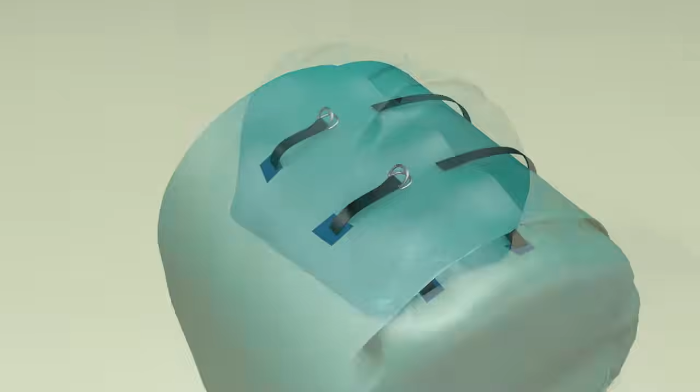Begin by unfastening the securing straps on the provided valise and roll the unit out fully.

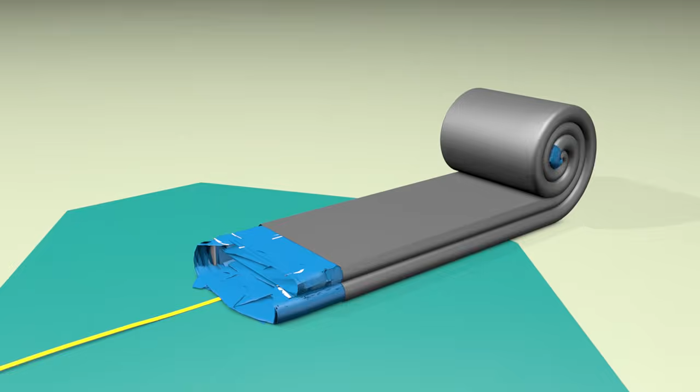With 2 people positioned on either side and making sure that the outer canopy and internal tubing is held together, unfold the shelter.

Fold out the vehicle flaps. Locate the inflation and deflation valves from beneath the labelled valve flap, and you're now ready to start inflating. The shelter is equipped with 4 valves, 2 for inflation and deflation with an electric pump, BA cylinder and hose,

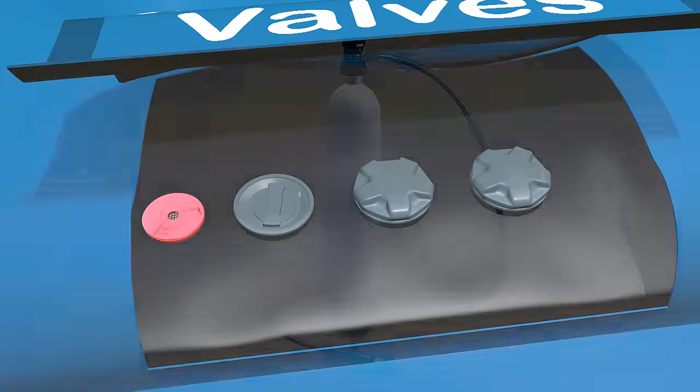or a 12-volt pump with a battery for when no standard power supply is available. A pressure sensor valve for use with a pressure sensor pump. This pump regulates the beam pressure and is in place for when the shelter is used over longer periods. And lastly, an overpressure valve to ensure the shelter is not over or under-inflated.

Begin inflating the shelter. The beams will inflate sequentially. This process will take no more than a few minutes. Listen for the activation of the overpressure valve. Once this starts to release air, you'll know you are at the optimum pressure and inflation is complete.

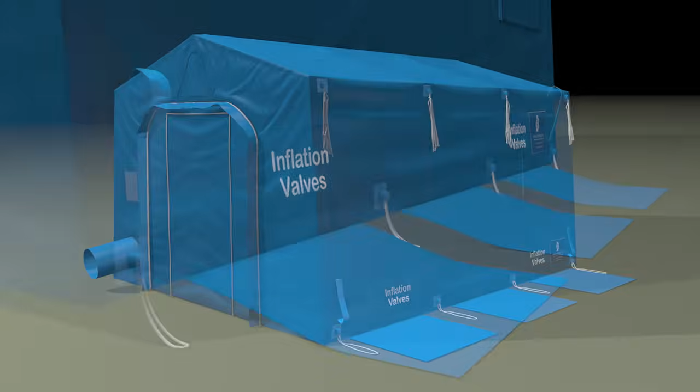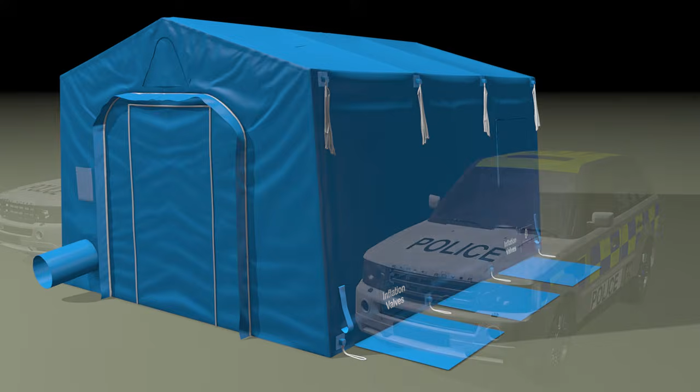There are grab handles on each corner, making the unit easy to position and reposition if necessary. High and low-level guy ropes, along with heavy-duty stakes. For hard surfaces, such as roadsides or mountainous terrain, the vehicle flaps can be used to ensure stability. The larger the shelter, the more anchor points and vehicle flaps are supplied, scaling with size.

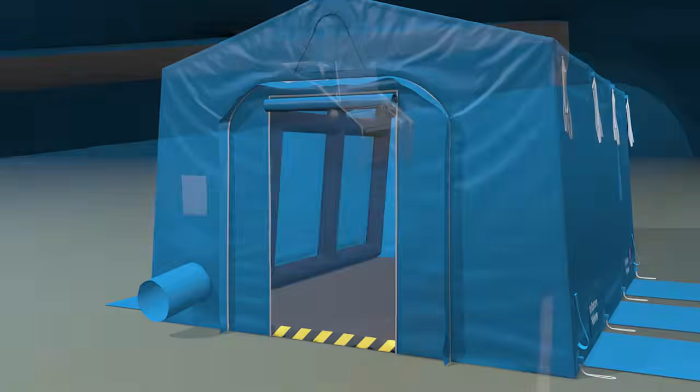Each door features 2 configurations: a large outer door, which can be fully removed for wide access, and a smaller inset pedestrian door, which can be unzipped and rolled up for controlled entry, offering privacy and limiting the flow of traffic. Once rolled up, the doors are secured in place with cam buckles.

Windows feature a 3-layer system. You can choose to use either the outer privacy cover, a clear PVC panel for natural light, or a fly mesh screen if increased ventilation is required.

All shelters are connectable via the doors, allowing additional annexes to be joined and endless configuration possibilities. Shelters are joined using either the zippers or by the Velcro rain gutter system.

Internal beams feature D-rings for attaching accessories such as lighting or room dividers. Service ports at either end allow access for services and ducting.

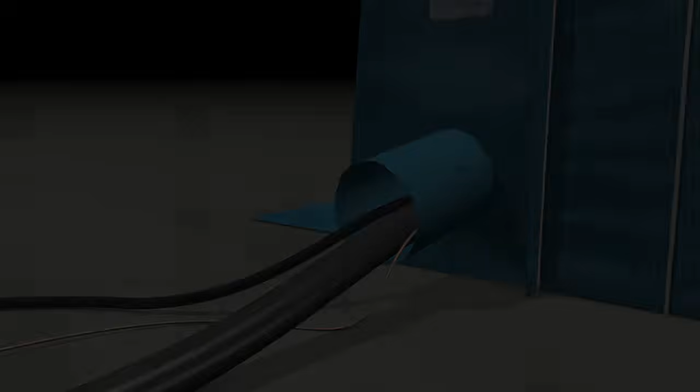The robust, airtight, sealed beam frame offers stability and durability. The outer canopy is waterproof, water repellent, and flame retardant, making the shelter reliable in any environment, perfect for fire and rescue teams, humanitarian relief efforts, emergency services, and training scenarios.

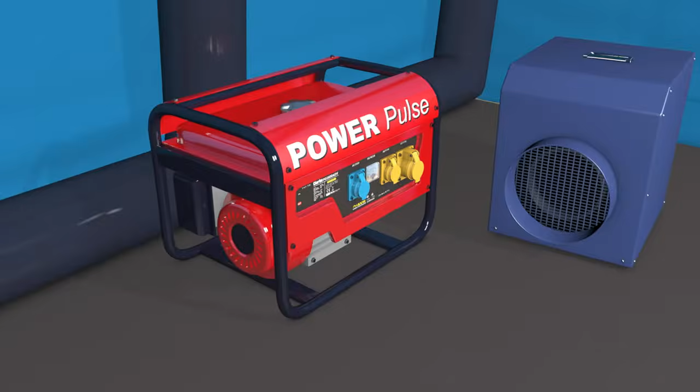With I.C.Brindle offering a full, bespoke service from the design to the supply, you are able to customize your shelter. Whether this is having your shelter in a particular color, adding organization branding, or additional doors and windows, to a range of accessories like various inflation options, lighting, heating, and power generators, we are here to ensure the product you receive meets your requirements and performs perfectly for its intended use.

As a guideline, the most common sizes include 8 meter by 5 meter for military and humanitarian use, 4 meter by 5 meter for fire and rescue services, airports and medical teams, 3 meter by 4 meter for police and forensic teams, 3 meter by 2 meter for search and rescue missions.

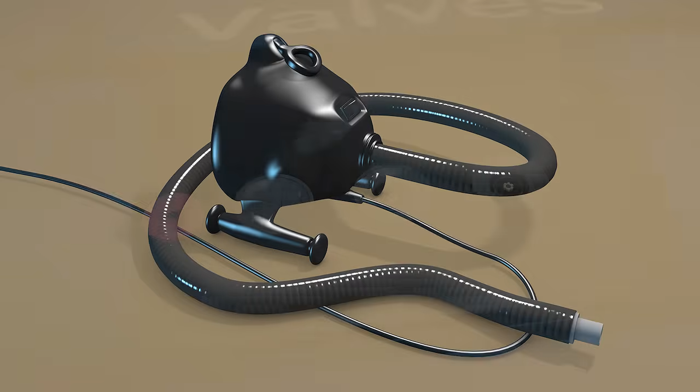To repack your I.C.Brindle shelter, unzip at least one door and release the center of inflation-deflation valves. Use the pump in reverse and fully extract the remaining air. Once the air has been removed, reseal the valves to prevent any air re-entering the beams.

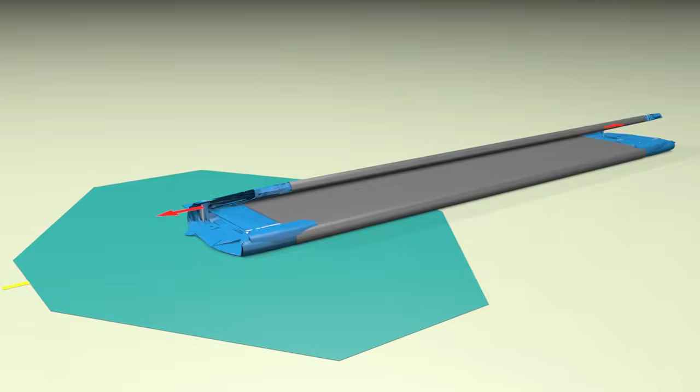Whilst holding both the outer canopy and internal beams, align the folds. Fold inwards until you are roughly the width of the valise. Roll your shelter, place it into the center of the valise, and secure in place with the buckles.

Your shelter is now ready for storage and its next deployment.